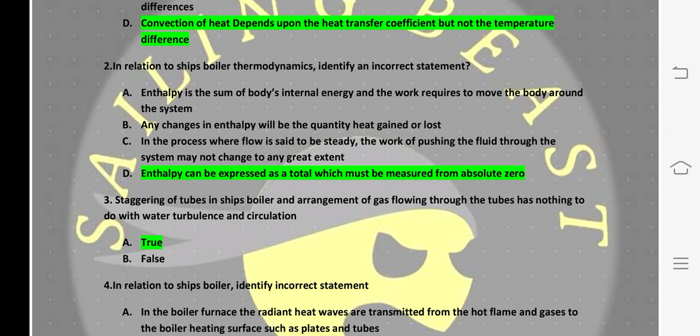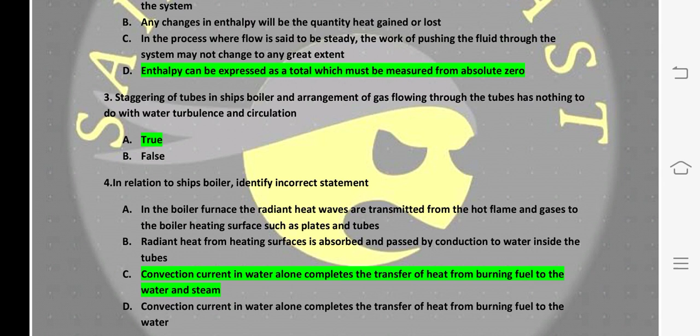Question number 3, staggering of tubes in ship's boiler and arrangement of gas flowing through the tubes has nothing to do with water turbulence and circulation. So it is true. Question number 4, in relation to ship's boiler, identify incorrect statement. So answer is C. Convection current in water alone completes the transfer of heat from burning fuel to the water and steam.

Question number 5. If the oil scraper ring drain hole in diesel engine piston becomes plugged, so answer is C. Oil consumption will increase. Question number 6. The pressure energy of exhaust gas is converted into kinetic energy in, answer is C, turbine nozzle.

Question number 7. When the leak has developed in the lube oil cooler of an operating diesel engine, which of the listed operating conditions can take place? So correct answer is B. Lube oil level decreases. Question number 8. Which of the following characteristic is true related to mating spur gear? So correct answer is A. Large diameter gear will rotate at slow speed.

Question number 9. High pressure steam drains are normally discharged to. So correct answer is A. DC heater. Question number 10. To determine if lube oil filter elements need changing. So correct answer is D. Check the pressure drop across the filter.

Question number 11. If the analysis of used lube oil indicates high contents of iron particles, this could indicate. So correct answer is C. Excessive ring and liner wear. Question number 12. Two important considerations to maintain proper lubrication of diesel engine includes the delivery of oil in sufficient quantity along with an acceptable, answer is C, viscosity index.

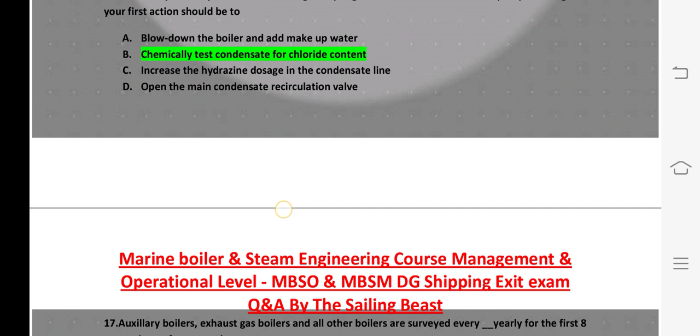Question number 17. Auxiliary boilers, exhaust gas boiler and all other boilers are surveyed every dash yearly for the first 8 years and thereafter dash yearly. So for the first 8 years it is surveyed every 2 years and rest of the time it is surveyed annually. That is 1. Option is B, 2, 1. Question number 18. Water tube high pressure boilers are inspected every dash years. So correct answer is D, 2 years.

Question number 19. Steam plant has been running on steady load and the turbine operation suddenly stops on a vibration trip. If this is due to fault in the boiler system, identify which one is most likely.

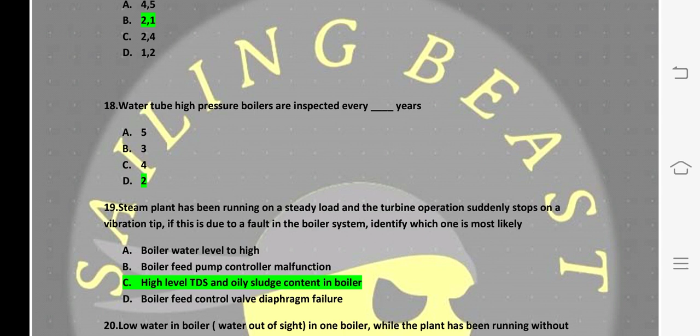So answer is C, high level TDS and oily sludge content in the boiler. Question number 20. Low water in boiler, water out of sight in one boiler while the plant has been running without any problems. Identify the most likely reason. So correct answer is tube failure.

Question number 21. Prior to relieving the watch, you should first check fire room status by verifying the fuel oil pressure to the boilers and answer is boiler steam pressure.

Question number 22. During port watch on board the tank vessel while cargo operations are in progress with the jacking gear engaged and running, you notice 200 gallon drop in the reduction gear lube oil sump level. Which component or condition should be checked immediately? So correct answer is B. Confirm with deck officer that there was a change in vessel trim.

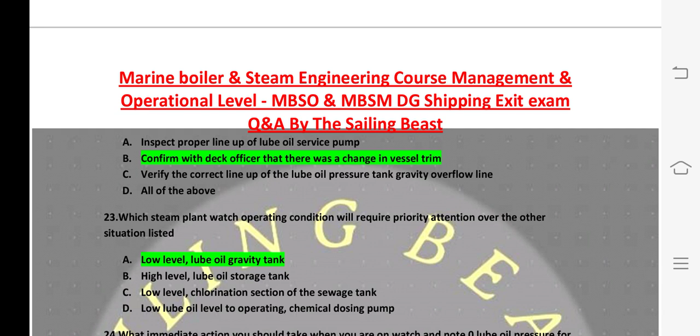Question number 23. Which steam plant watch operating condition will require priority attention over the other situations listed? So correct answer is A. Low level lube oil gravity tank. Question number 24. What immediate action should you take when you are on watch and note zero lube oil pressure for the operating marine turbine? So correct answer is C. Stop the shafts.

Question number 25. When relieving the watch in fire room, you should first check the boiler water level and answer is B. The condition of furnace fire. Question number 26. Prior to relieving the watch, you should first check the fire room status by verifying the water level and answer is B. Fuel pressure to burners. Question number 27. When relieving the watch in the fire room, you should first check the boiler water level and answer is A. Boiler steam pressure.

Question number 28. Which steam plant watch operating condition will require priority attention over the other situations listed below? So correct answer is D. High water level in the main propulsion boiler. Question number 29. When relieving the watch in the fire room, you should first check the boiler water level and answer is B. Fuel pressure to burners.

Question number 30. During cargo operations, you notice a very large increase in reduction gear lube oil sump level from previous logbook entries. What would be the most probable cause of this large increase in sump level? So correct answer is lube oil gravity tank is empty.

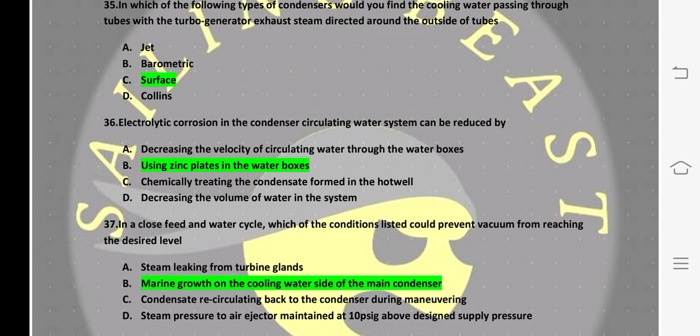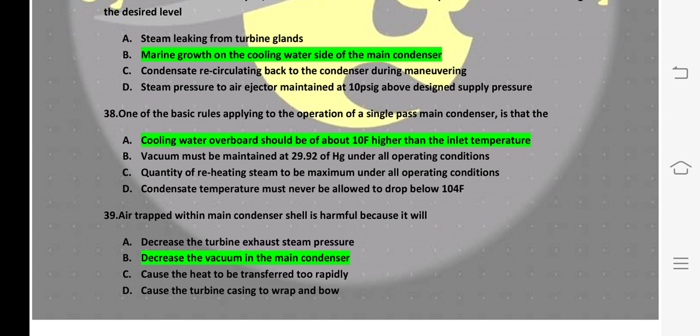Question number 38. One of the basic rules applying to the operation of single pass main condenser is that the answer is A. Cooling water overboard should be about 10 degrees Fahrenheit higher than the inlet temperature. Question number 39. Air trapped within main condenser shell is harmful because it will. Answer is B. Decrease the vacuum in main condenser. Question number 40. Which of the condensers listed below are cooled by seawater? Answer is B. Main condenser.

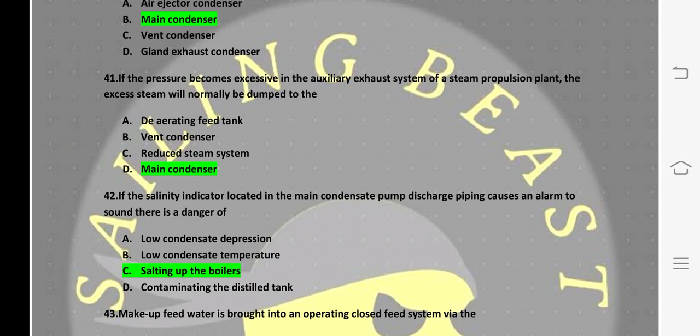Question number 41. If the pressure becomes excessive in the auxiliary exhaust system of a steam propulsion plant, the excess steam will be normally dumped to the answer is D. Main condenser. Question number 42. If the salinity indicator located in the main condensate pump discharge piping causes an alarm to sound, there is a danger of. Answer is C. Salting up the boilers.

Question number 43. Makeup feed water is brought into an operating closed feed system via the answer is condenser vacuum drag line. Question number 44. While underway, a vacuum in the main condenser is primarily caused by answer is B. The condensing of exhaust steam. Question number 45. Identify two methods of freshwater production on board ships. Answer is B. Distillation and reverse osmosis.

Question number 46. When operating with auxiliary feed line, feed water flow is controlled. Answer is A. Manually by throttling the auxiliary feed stop check valve. Question number 47. The function of feed booster pump is to. Answer is increase the net positive suction head of the main feed pump.

Question number 48. The pressure in the feed water system must exceed boiler steam drum pressure in order to. Answer is C. Force the feed water into the boiler. Question number 49. What is the salinity of freshwater produced from the thermal process in terms of ppm of chloride? Answer is less than 4 ppm.

Question number 50. Recirculation of feed water ensures a flow of water through the, answer is A. Main feed pump. Question number 51. Insufficient cooling water circulation through air ejector intercondensers and after condensers will cause, answer is A. Decreased vacuum in main condenser.

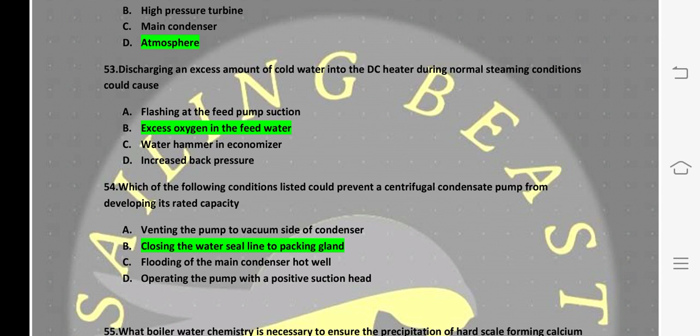Question number 54. Which of the following conditions listed could prevent a centrifugal condensate pump from developing its rated capacity? So answer is B. Closing the water seal line to packing gland. Question number 55. What boiler water chemistry is necessary to ensure the precipitation of hard scale forming calcium? So correct answer is D. Boiler water should have reserve of phosphates.

Question number 56. What is the main purpose of boiler water chemical treatment? So correct answer is C. To prevent scaling and corrosion in the boiler. Question number 57. Any feed water testing done on a routine basis would normally include testing for, answer is A. Chloride. Question number 58. Condensate pH test is carried out to, answer is C. Measure alkalinity or acidity of the boiler water.

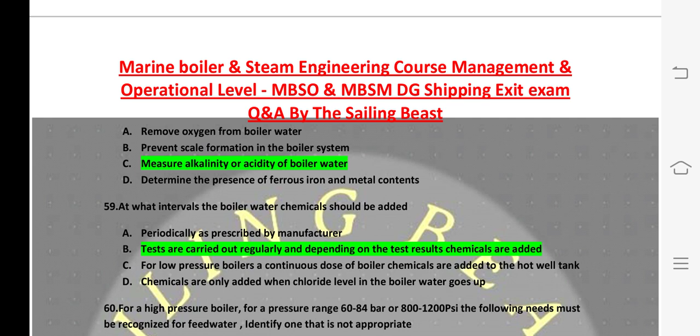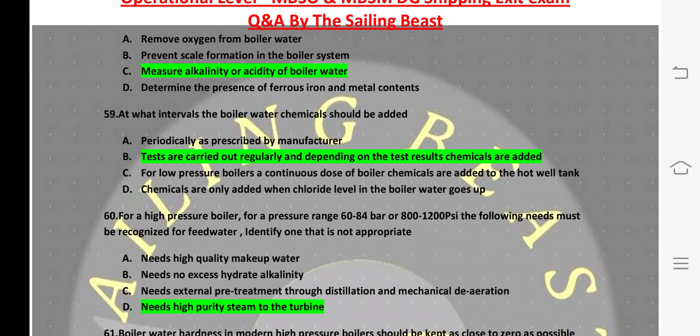Question number 59. At what intervals the boiler water chemical should be added? Answer is B. Tests are carried out regularly and depending upon the test results chemicals are added. Question number 60. For a high pressure boiler for a pressure range between 60 to 84 bar or 800 to 1200 psi, the following needs must be recognized for feed water. Identify one that is not appropriate. Answer is D. Needs high purity steam to the turbine.

Question number 61. The boiler water hardness in modern high pressure boilers should be kept as close to as possible. Sorry, I will repeat again. Question number 61. Boiler water hardness in modern high pressure boilers should be kept as close to zero as possible by chemically treating with. Answer is A. Trisodium phosphate.

Question number 62. For a high pressure boiler, for a pressure range between 60 to 84 bar or 800 to 1200 psi, the following needs must be recognized. Identify one that is not appropriate. So answer is D. Use of two different phosphate prevented any issues with the complete program control of the feed water.

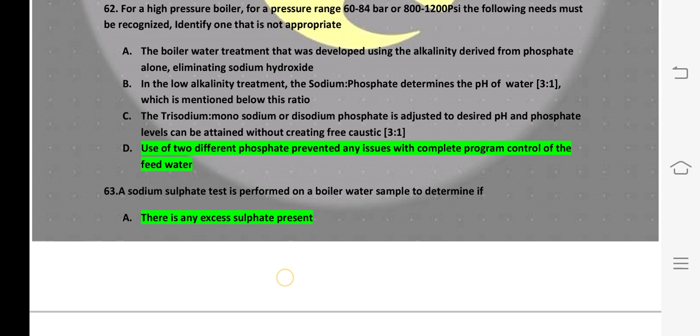Question number 63. A sodium sulphate test is performed on a boiler water sample to determine if. Answer is A. There is any excess sulfate present. Question number 64. Boiler water hardness is increased by. Correct answer is B. Scale forming salts in the feed water.

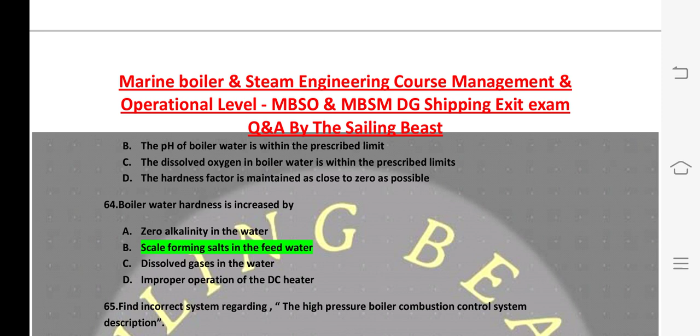Question number 65. Find the incorrect description regarding the high pressure boiler combustion control system. So answer is D. The system works on a feed forward type of control without needing a feedback.